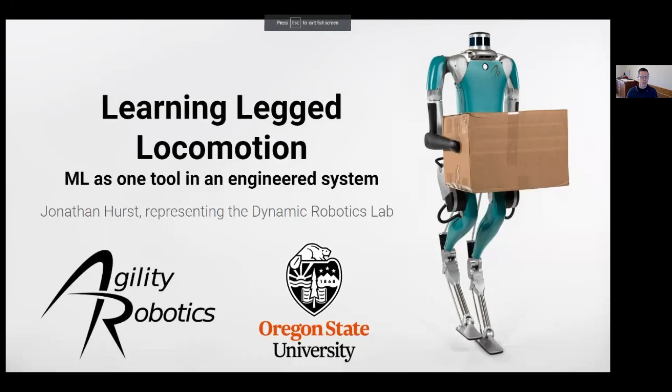Machine learning is a great tool. It's one of many. It's not a magical box. What I'm going to talk about for the first bit here is how legged locomotion is basically a special corner of dynamics. It's kind of a dynamical phenomenon, like a pendulum in the way the pendulum keeps time, or a spring mass system.

Same thing, it's periodic. And I think something like that is the foundation of legged locomotion. It's not just dynamics in general, trying to get robots to do arbitrary things. It's more to capture this special corner of dynamics and work with it.

And there's a lot you can do without machine learning. Most of legged locomotion progress to date is without machine learning. But I don't think you can do everything. I think too much of the approaches to date are model-based, and models, what do they say? All models are wrong, but some are useful. Certainly models are always simplified, and the question is how much simplified? It's a reduced order model, but how simple is it?

It's not capturing all the dynamics of the robot. And if you really want to get into the corners and really get into all the dynamics that a machine can achieve, I think that's going to have to be done with strange nonlinear representations that can probably be learned with machine learning. So the question really is, how do you guide this learning process when we already know so much about the goal? There's a lot of science we know about legged locomotion. So how do we incorporate that and steer our learning process given what we know?

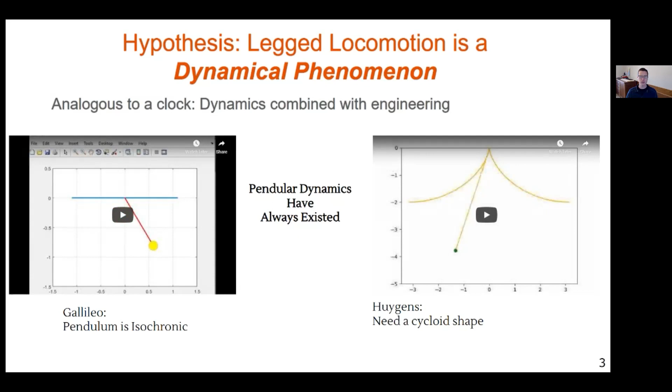And I think where we are today is more on the Galileo side, where we've kind of made some observations that this spring mass behavior really gives us some stability. And here's a simple model. This is very much a reduced order model, but it describes some really interesting things that we observe in all animal locomotion. It's very, very self-stable. It's very robust. There's a lot about this that is really interesting, that we think is kind of a special corner of dynamics.

This is sort of like a discovery. But again, I think this is kind of the Galileo version of the pendulum, where maybe this is capturing 80% or 75% correctly what's really going on. And we have yet to understand really what is the full, perfect picture of this dynamical phenomenon, or how to utilize it. That's okay, still useful.

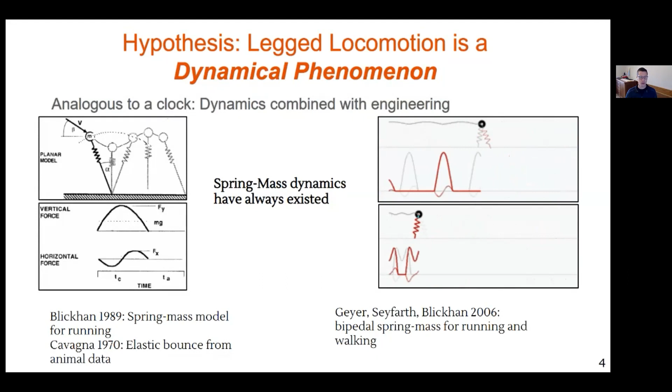And then I talked about engineering to capture the dynamics. If you think about a clock, it's not just a pendulum. You have to add energy to it. You have to count up the number of swings. You have to create a readable interface. You have to figure out how to insulate your pendulum from all the friction and all of the interference and all of the dynamics of your gears and things like that, or the weight or the temperature effects, air pressure, all the other things in a clock.

So hundreds of years of engineering went into making clocks decent timekeepers, with the pendulum anyway. And eventually, of course, they went to quartz crystals, which are oscillators and electronics, and so on. But let's ignore all that for now, and just talk about the special corner of dynamics that is a pendulum, and how the analogy between that and legged locomotion.

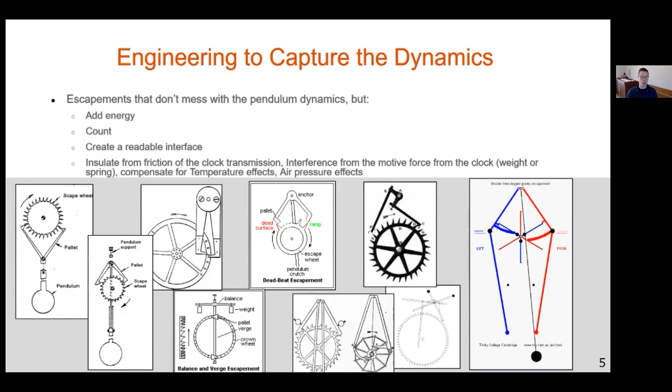Great, okay, so legged locomotion is a dynamical phenomenon, something like a clock, but there's a ton of engineering you need to do. And here's some of the engineering to capture the dynamics for legged locomotion.

Early on, we said, okay, I think we understand that this spring mass model is at least close, right? It's something, it's not just a descriptive pattern. It is very close to what the actual physics are that give us stable behaviors and robust behaviors and efficient behaviors on animals, and should be able to do on machines.

So we designed Atrias, which is an acronym for assume the robot is a sphere. The whole idea is to build a robot, build a machine that is as close as possible to this simple math model. And early experiments here, you can see the force and the ground reaction force when we pick up the robot and throw it in the air.

The motors are turned off. It's just going to bounce a few times. And we're getting pretty close to the ideal spring mass model. The green dashed line is the simulation. The orange line is what the robot actually did when it landed on the ground. So we built something really close to a spring mass model, okay?

Then we built it into the full bipedal robot, and we were able to get Atrias to do continuous transitions through the speeds between walking and running, which reproduced exactly what we saw in simulation. Very early on in the program, we were able to walk and run over all kinds of terrain, unexpected step ups and steps down that were a significant fraction of the leg length. It didn't matter what surface we were running on, grass or pavement or soft foam. It was self-stable. It just shrugged off all of those sorts of things as a dynamic behavior.

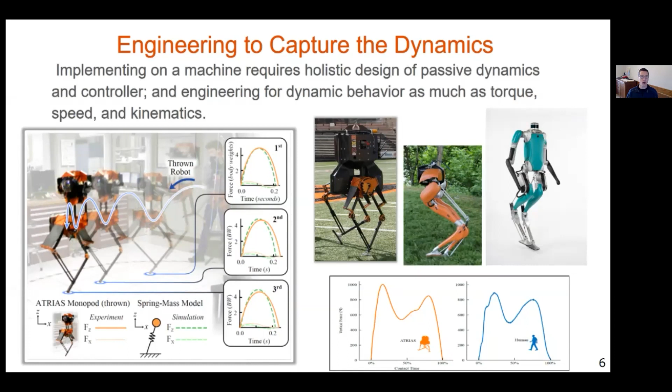So I talked just a little bit about the actuators, and I think this is an important point. Actuators have dynamics. They are a physical thing, and they are definitely not what you want them to be. So a lot of the machine learning demonstrations in simulation or control demonstrations for legged locomotion have been with simulated robots where you can apply the torque that you want at every joint. And that will never happen on an actual real robot.

In addition, the actuators, especially the electric ones we use, have a lot of what we call reflected inertia. That just means when you instantaneously change the speed of the output by a small amount, the motor itself, the rotor, has to change its speed by a very large amount because there's a gear ratio on it. And that reflected inertia of the rotor spinning up that you feel through the output can be very, very large.

It can be on the same scale as the mass of the entire robot. So when you take a robot that has a 100-to-1 gear ratio, like a harmonic drive at the knee, and you lift it up and drop it on the ground, you're basically causing an inelastic collision between the reflected inertia of your motor and the mass of the robot. It doesn't matter what software you write, it's going to be that way because it's physics, it exists in the hardware.

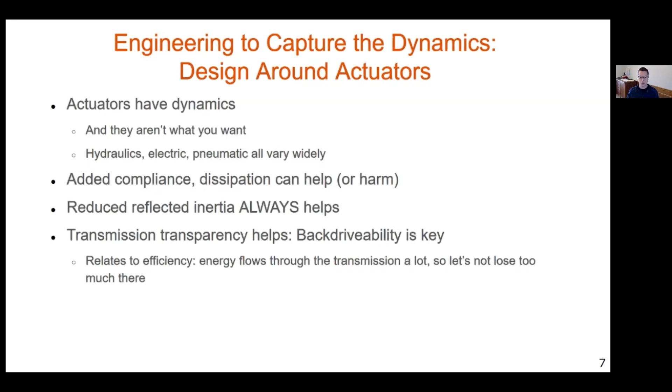Certainly there are a lot of adaptations in animals with structures like tendons and the way the muscles are configured and shaped on joints that clearly alter and vary the dynamics of the muscle. So in an animal, it is absolutely not all software. It's not something where you're sending muscle commands to have your arms and legs do what they want. There's an immense amount of passive dynamics designed and built into all animals in order to create appropriate dynamic behaviors.

Okay, so a little bit more about this, designing around the actuators. Transparency is key. And transparency, I would define as: in software you command a torque, and in hardware you get exactly that torque, at all frequencies, at all amplitudes.

So if you command 500 newtons, you get 500 newtons. If you command it to oscillate between positive 500 and negative 500 newtons at 5,000 hertz, you get it. Obviously that's not possible because of the inertia associated with motors, electrical dynamics, and everything else.

So if you can reduce your reflected inertia, make your motor rotor lighter, make your gear ratio smaller, find a way to get enough torque out of something without having a big gear ratio, eliminate friction, have a completely transparent efficient transmission - things like cable drives - we got something like 93, 94% efficiency in the cable drive on some of these early robots.

That's great. There's other drawbacks to a cable drive, but a harmonic drive is about 75%-ish for friction, and that can be really limiting if you're trying to apply forces to the world because you don't know what force you're applying.

I'm getting a question from someone: what would I like to see from the future of electric actuators? The best example, Ghost Minitaur, is a great direct drive robot. At a very small scale you can do that - you can have relatively very low inertia and relatively enough torque to do what you want, and get that robot to leap and jump and do all kinds of things.

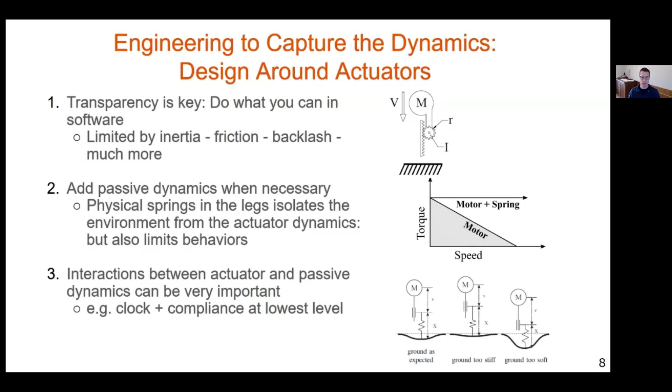Let's see, what else can I say on this slide? Early on, it was an interesting observation that if you have some sort of clock cycle - say your controller is only operating at 30 hertz, while control systems can run at 2 kilohertz easily - you still can't really perceive your environment. Sensors are always noisy, late, and wrong. So it's very, very hard to plan exactly what you're going to do through some sort of impact or contact with the ground.

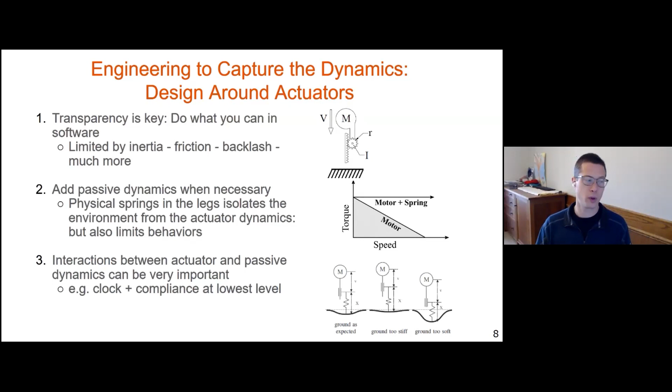But if you have a clock-based feed-forward cycle based on what you expect to happen, in series with a big compliance, we found that's very self-stabilizing. If you hit a little early, a little late, or hit ground that's too hard or too soft, the immediate reaction just from the dynamics of that clock in series with the spring is stabilizing - it causes your ground reaction forces and center of mass motion to go in the right direction. Then you can react fairly slowly, but creating that stability as an inherent part of your system is what's important here. There's a lot to solve there, a lot of science still not understood.

Okay, so I talked about the dynamical phenomena of legged locomotion. Maybe another way to think about it is as some sort of periodic attractor. When I talk about a pointer pendulum or a spring mass system, that's a 1 degree of freedom system - there's really not a lot you can do to influence that system. It's just 1 degree of freedom. It is stable. It keeps time.

One of them for sure is transitioning between the gaits. Maybe that's how much energy you add, or how you change your clock cycle in order to scale between them. But whatever gait you land on is still a stable, self-stable periodic attractor - just you've got this degree of freedom. Now another one might be stride frequency and stride length. I don't know the answer really.

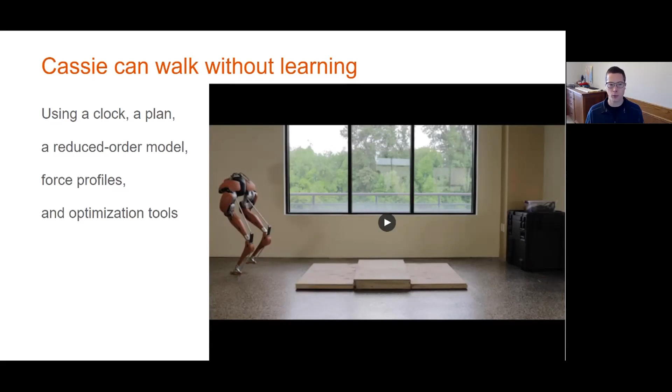We have a reduced order model inside that allows us to make choices about, say, where to place the feet in order to stay balanced, and an optimization tool so that you can basically map this very complex robot - with lots of joints and more behaviors possible than the reduced order model would enable - but optimize for your priorities so that you actually get close to what your reduced order model is saying.

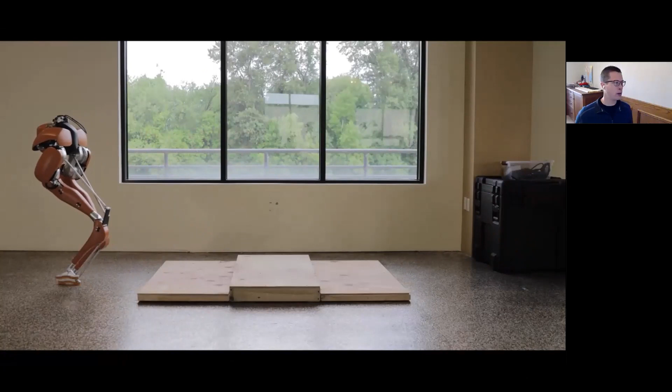So here's Cassie just walking over some unexpected terrain and handling it pretty well because of the transparency in the actuators. You'll see that the robot maybe steps up a little bit, but at first when it steps on these, the leg kind of squats a little bit. The leg just kind of takes that obstacle.

Think of it as force control. If you're applying a certain amount of force on the ground, then the deflection of the leg doesn't matter. And that's kind of what's going on right here.

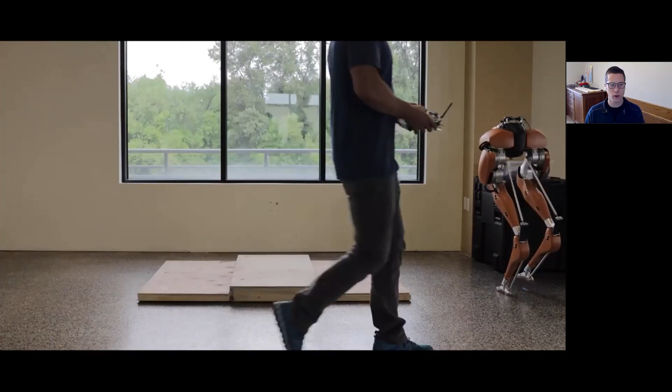We have a priority for how much force we're going to apply, and also a small priority for position. Because say you know exactly what force you want to apply, but you've got a tiny error in the force you're applying, the robot is either going to sink to the ground or accelerate up continuously. So you do want to have some priority as well on the position where you are. That's what I mean by optimization tools. We've got several different goals, and it's balancing between those goals, kind of trying to optimize for things.

Hey, Jonathan. Yeah. Can I ask a quick question? Please.

With respect to your point about locomotion being a dynamical phenomenon, can you comment on the sort of anxious pace that Cassie does even while stationary? Cassie can certainly stand, but our controller has a clock as part of its foundation, so really it's walking at zero velocity when it's stationary, because we turn on the walking gait and walking behavior, and then we can just change its velocity. That changes its foot placement in order to go forward or backward at different speeds. That's all it is.

I don't think that's necessary. It's just that's what our controller is doing right now.

Oh, that makes sense, because you're just getting ready to steer it. You're getting ready to drive it, right? Yeah, and so this is very manual, right? The operator is saying on his controller, okay, turn on walking gait behavior, okay, change speed forward, backward, etc.

There's not a lot deeper than that that's going on here. But what I would like to be doing is going towards this kind of periodic attractor, which probably has a zero energy point too, that's also stable, which is standing, which probably looks a lot like zero moment point control. It's just using ankle torques in order to stand in one place. But that, I think, is on a continuum along with the walking, running, hopping, skipping, jumping, and all the other things. I just don't think we've figured out how to implement that well on hardware.

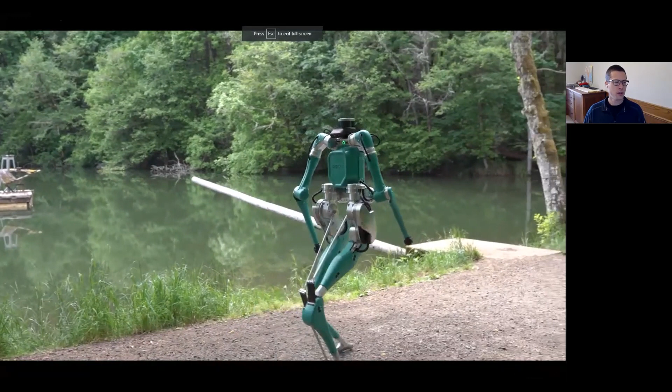I also want to show a couple of brief videos, the only two I'll show, of Digit walking around outside. It's the same configuration of legs as Cassie because physics is still true, and the reasons we designed the legs the way we did are still the case, although there are a lot of differences internal between the Cassie and Digit legs.

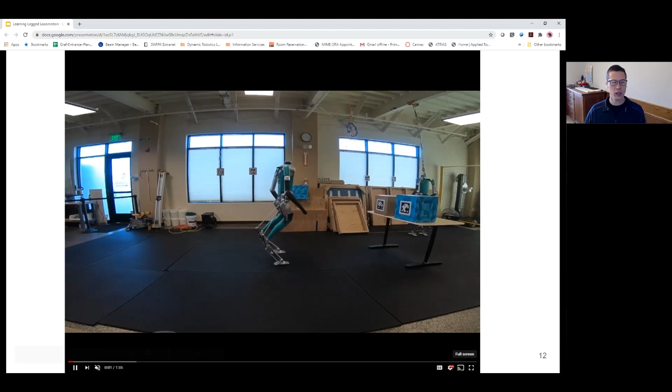Building on the locomotion, which we haven't been paying a lot of focused attention to, we've been working on incorporating using the arms to swing, to manipulate the world and balance the robot with different masses of things you're picking up, catching the robot when it falls, reorienting to get back up, and starting to add in perception. The robot here is using QR codes to identify where the table and box and everything is in the room, using LiDAR to avoid obstacles. So we're starting to build a much bigger stack on the foundation of basic locomotion. There's so much room for improvement in absolutely everything the machine does, so we really have to pick and choose what we're going to be doing.

The nice thing about learning, as I mentioned earlier, is it gets into the corners, I'd call it. What I mean is that when we're controlling Digit or Cassie, we're relying on some reduced order models, and that constrains our behavior. There's a real constraint.

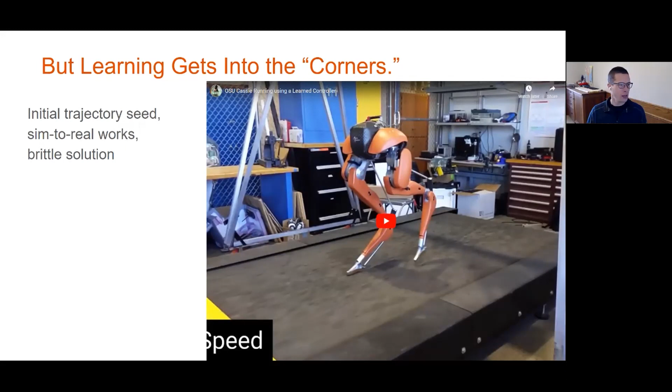But in this video I'll show, we started with an initial trajectory seed that came out of Cassie's traditional controller we'd already created. We tried it on the robot for the very first time, and it worked. We were able to do the simulation-to-real transfer. I think a lot of that has to do with the correlation between the robot's behavior and the simulation's behavior.

It also has to do with the self-stability of the behavior we're trying to create. The robot is roughly a spring mass system, so inherently it has a lot of those stabilities I talked about early on in this discussion. But we're not really explicitly utilizing them, we're kind of accidentally utilizing them here, and it is a pretty brittle solution.

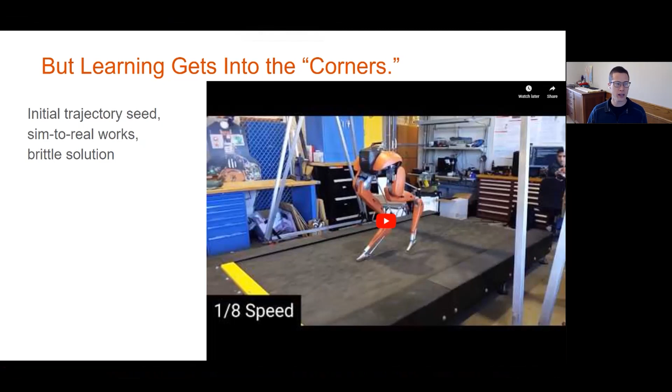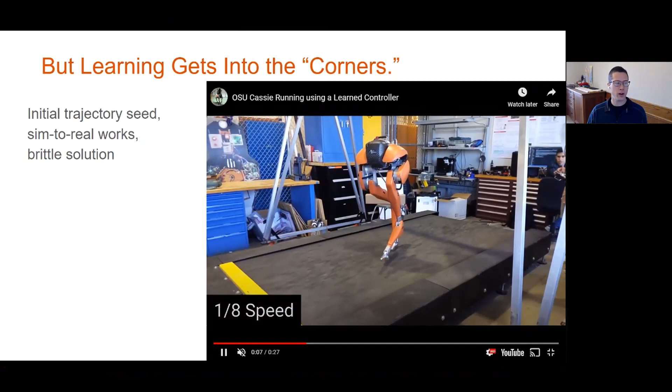This running gait, I love it, I think it looks very biological, I really like it, but it does fall reasonably easily. It's very sensitive to the friction cone on the feet. This behavior worked on the treadmill, but when we did it on the road, even the crown of the road, it was falling sideways. It would twist its feet when they'd slip and twist on the ground on pavement, and it would fall over.

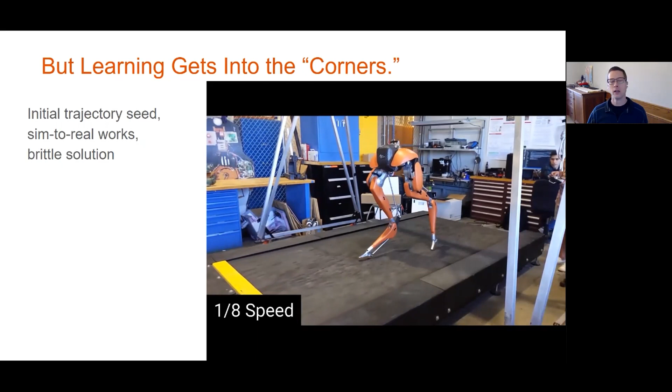So this particular initial idea was pretty brittle, but what a dynamic behavior we couldn't achieve without learning. I'm actually taking longer than I thought to talk, so I'll have to move along a bit here. But the question is: how do we guide the learning process when we already know so much about what we're trying to achieve?

There's a couple of ideas we have in the lab, starting with learning a gait library, and then using this reduced order model both for training, to give you the full range of different gaits, and for control, as a way to define the action space. We can use our reduced order model to go through the range of different gaits, trot, or with a biped it's just walk, run, skip, jump, working towards real-time model predictive control using that reduced order model.

Now the next idea is let's learn in task space, since that's the common language. What should the feet be doing? What should the center of mass be doing?

We already know a lot about the robot, and we already know a lot about how to coordinate the joints. So why would we relearn how to do all of that and put the burden of the inverse dynamics and inverse kinematics on the learning system? We can just put that in there and learn in task space.

And the next idea is, okay, forget reference trajectories, forget even models. Let's see if we can describe everything we know about legged locomotion through the cost function. That gets some interesting results if you're very careful about it. But then kind of back to a little bit of the middle ground, that clock seems to be really important for periodic behaviors. Can we give it a really simple trajectory, just a clock signal basically, but describe legged locomotion by the cost function, and where do we get with that?

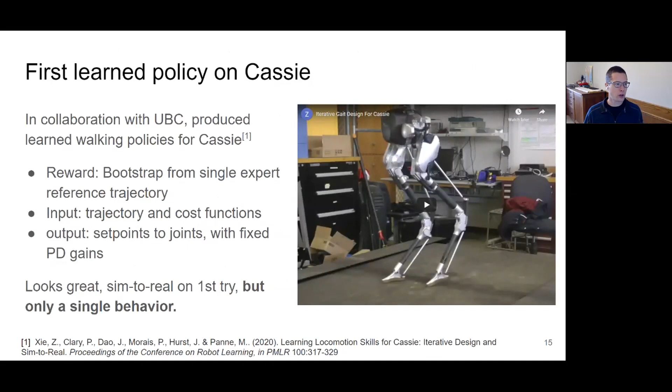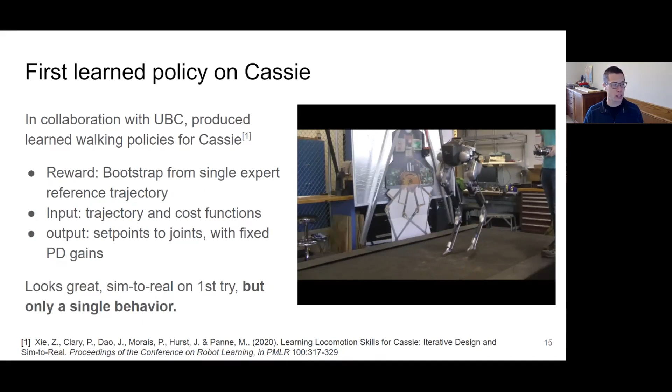So this is the first learned policy on Cassie, in collaboration with Michiel van de Panne and the University of British Columbia. And kind of like the running behavior I just showed, it's bootstrapping from a single expert reference trajectory. It's just giving it position trajectories, which in my opinion is a very incomplete description or even hint of what's important. Because certainly if you hit the ground a little high or a little low, or you have a slightly different environment that you're encountering, you don't want to be running that original trajectory at all. That would be a bad choice. So it's bad information to bootstrap from. Nonetheless, we were able to get some pretty good results, but only for this kind of single behavior we were creating. And it did give us some interesting stability and robustness. I don't know why, but it did.

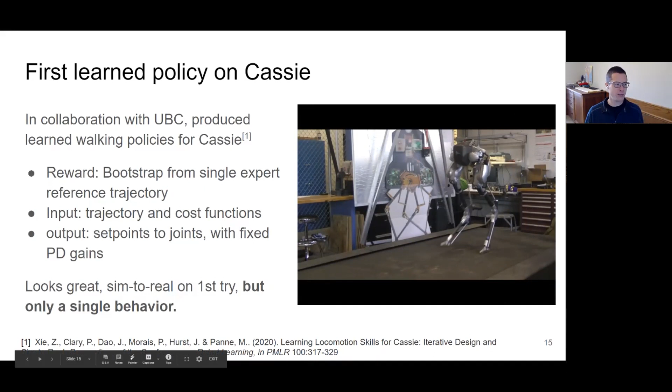So the next idea I mentioned, right? Let's use a reduced order model. Let's create a whole library of hundreds of different gaits that come from or are inspired by different gaits from the reduced order model. And here we're giving it a lot more information than just trajectory. We're giving it the pose, yes, but we're also giving it the velocities. So we have an idea then of the forces that are being applied, because that model has those physical springs built in. And then we are, in this case, just commanding the set points to the individual joints.

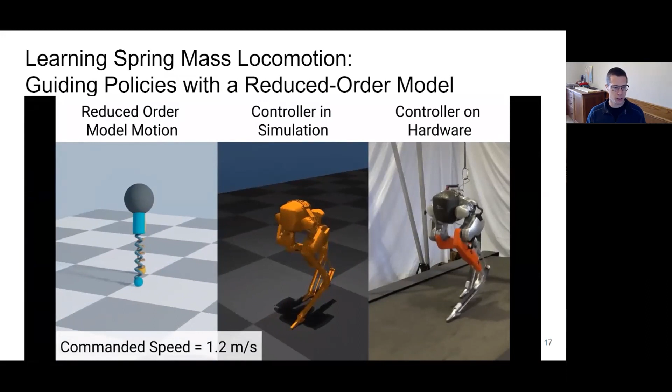So this continues to be work in progress. It's aiming for IEEE right now.

Now, the next step with this is, instead of having a gait library, do something that's a reactive planner, something that has some perception of the world, chooses what it's going to do at the reduced order model level, and then has the motion command. I don't know if I would even call it a motion command. It's more like, what is the state of the reduced order model? What forces, what is the set of dynamics that you're trying to create? If the foot is about to impact the ground, where should it be? Approximately what force do we want to be applying at the given point in time? And if the ground impacts the foot at some point, how do we want that foot to react? What kind of impedance would we want it to have at that point in time? So that's a lot more information than just a position trajectory, because we are creating a dynamical behavior here.

Okay, so then the next idea I mentioned: why would we learn all the joint coordinations independently if we actually have a lot of information there already? And sure enough, when we learn in task space using this reduced order model kind of thing, it learns a whole lot faster. It doesn't have as much to learn. And it is successful in doing some nice walking gaits. This kind of looks a lot like that spring mass behavior, but it learned it pretty quickly.

I think there's a lot of promise here too. I don't know that the inverse dynamics, the inverse kinematics that we calculate for the robot are certainly not perfect, because there's a lot of unmodeled dynamics going on in the hardware. But this is showing that we're able to split things out in terms of how we tackle a particular problem. This is just a small part of the overall control system.

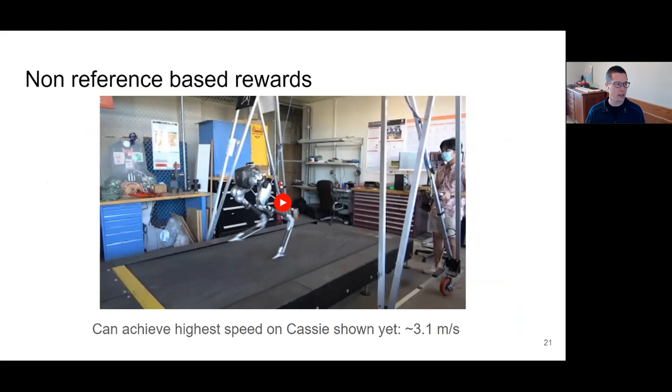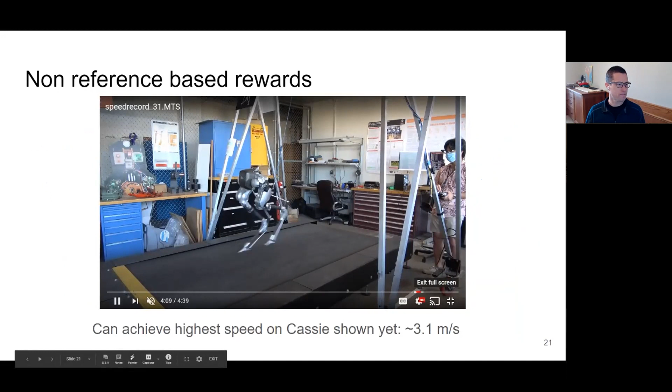Here is a non-reference-based reward — no trajectory, no prior behavior that we gave it, just describing it in terms of the cost functions. And we got the highest speed we've been able to show yet. This is actually faster than the running gait that I showed at the beginning. I like the running gait, but this is faster, so not too shabby.

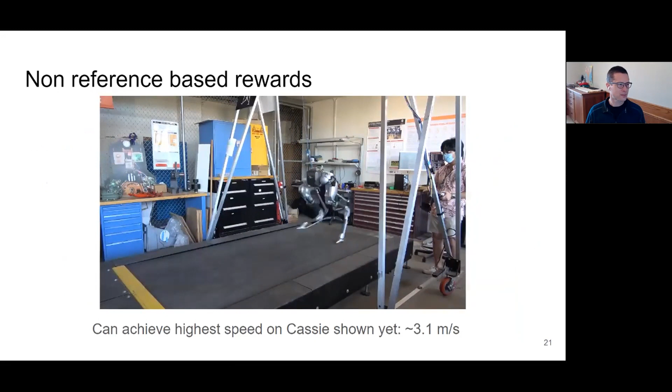All right, so the next idea. We're describing all of our behavior through cost functions, but let's pick a middle ground here — give it a little bit of a hint, a little bit of information. We don't actually know what an optimal trajectory should be. Maybe the reduced order model is too constraining, or we could do it in a much more computationally simple way. So that's what this effort is: choosing a set of clock inputs that are very easy to modify, very convenient for the learning policy to utilize, and much more computationally effective than using a reduced order model.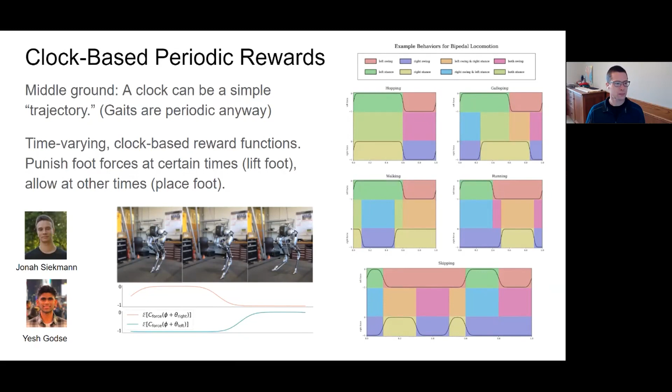We were able to get some really surprisingly good behaviors out of this, just choosing the duty factor of which foot is on the ground and when. Here's some transitions between gaits. By the way, we haven't shown any of these videos — this is the first time I'm showing these publicly. Some of these results are just from the last couple of weeks.

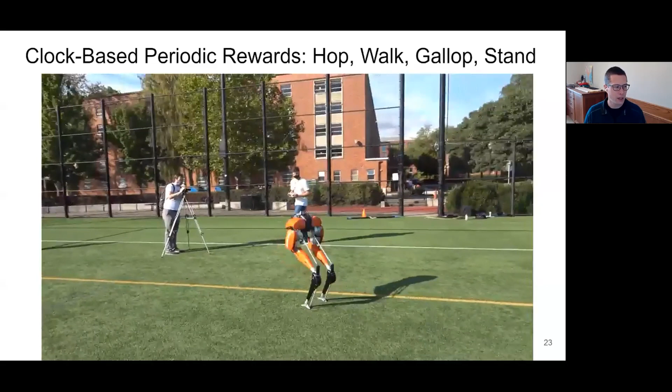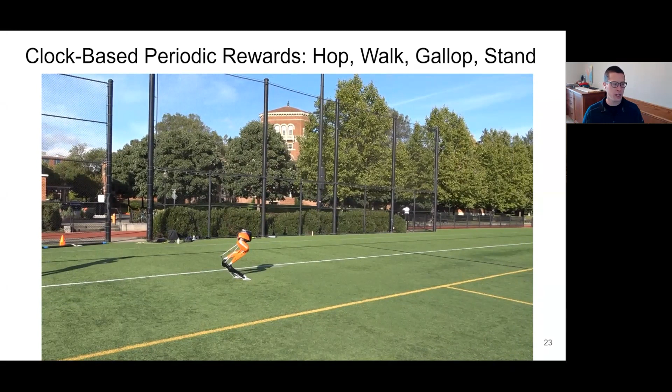Here's Cassie hopping, and it'll do a transition from hopping to walking gait, then a little bit of galloping, and back to a stand behavior. All of these were learned in simulation and then tried on the robot. There's no online learning with the robot — all the learning is done offline.

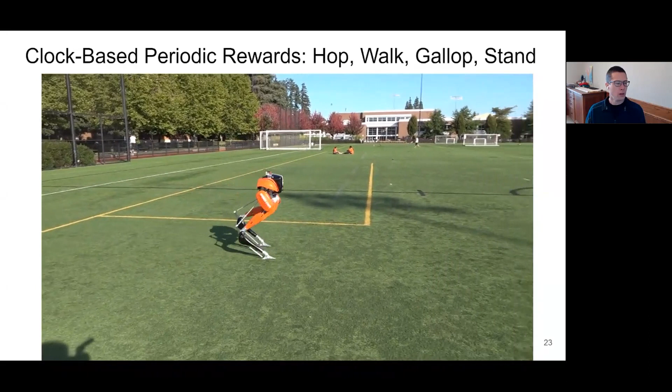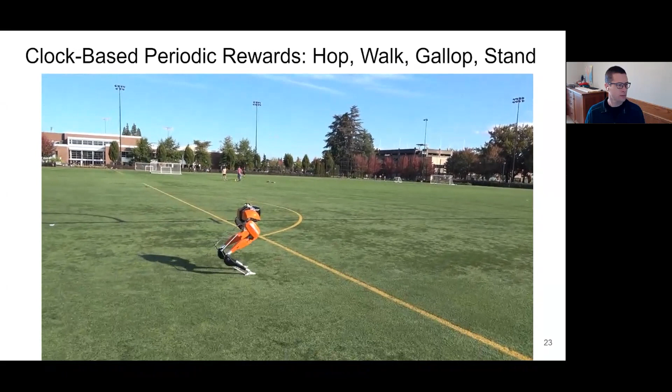And that's what it looks like standing, right? We're still working on having that clock come down to zero amplitude so they can stand in place.

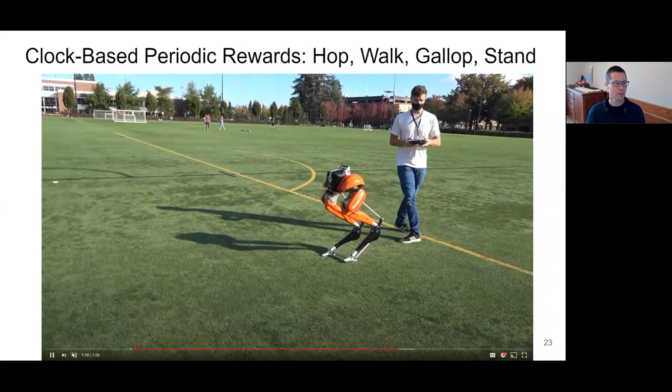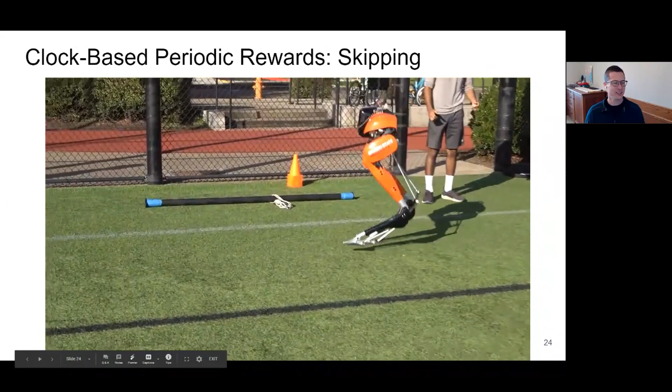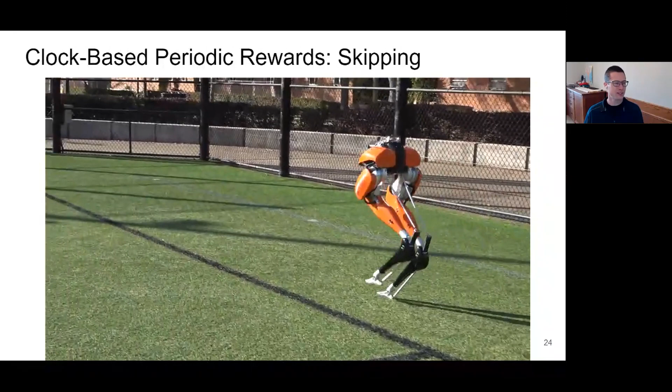And this one is pretty cool. There's no good reason to skip, but we can change our clock cycle a little bit and make the robot look very happy. Nice sunny day outside. Off we go. We need to get a red hood for the robot and a basket.

Oh, okay. I didn't cut out the fall.

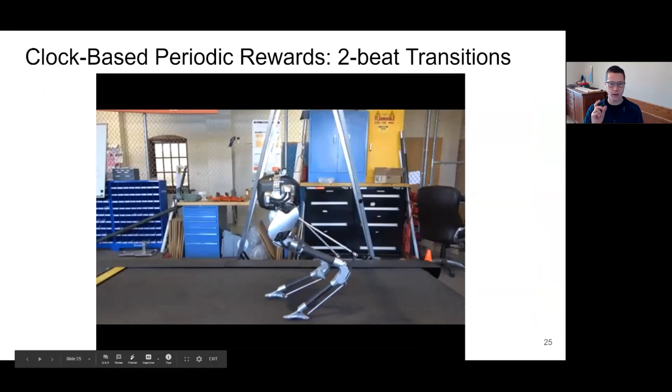So when we're doing the clock cycles, we can do a couple of different options. Here's a transition for the two beats. So really we can only do walking or hopping when we have just the two beats for the gait transitions. But we can do the transitions between them pretty smoothly.

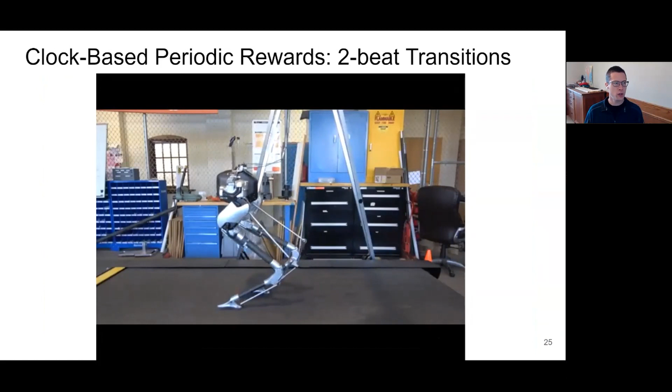And then if we increase the number of beats to a four-beat transition, we can include a couple of other gaits like the skipping behavior and a gallop behavior, and transition between all of those.

So this, by the way, is not task-based control. This controller is learning all of the coordination between the joints. It takes quite a long time to train in order to do that. I'm sure we can do better if we split things up a bit, but we're getting some decent results this way too. I was curious about this before, actually.

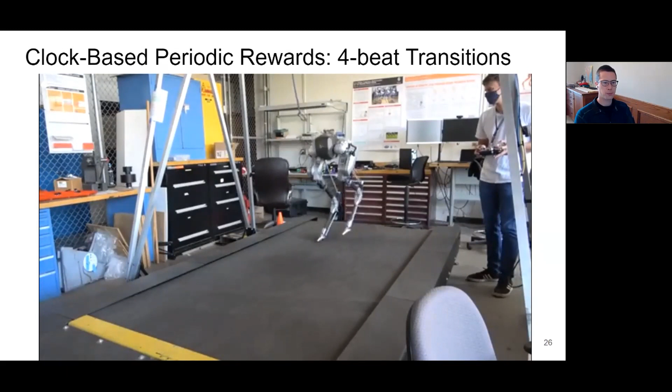Do you have like a one-sentence answer for what class of algorithms you're using to do the training?

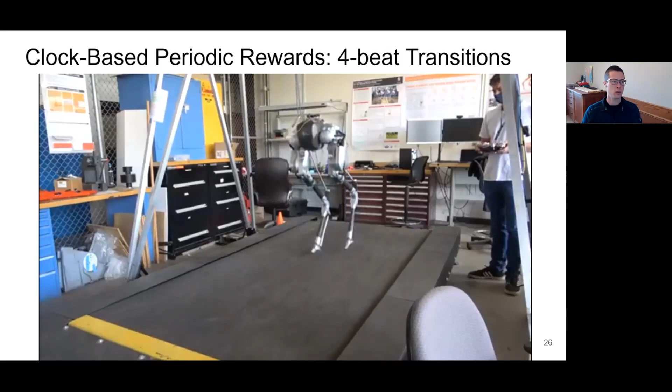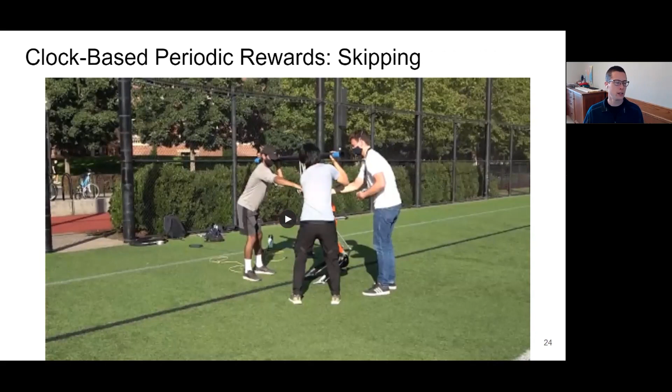It's a good question. The focus of this research is not on that. We're using old, classic, decade-old kinds of algorithms. There's not a lot of innovation on exactly what algorithms we're using for machine learning. The innovation is entirely how do we structure the problem and how do we engineer it. I think this one was with recurrent neural networks for some of these behaviors, like the skipping behavior, but there's also just feed-forward networks that have no internal memory whatsoever. It seems like we're able to be successful using a number of different approaches, and maybe that's less critical than setting up the structure of the problem.

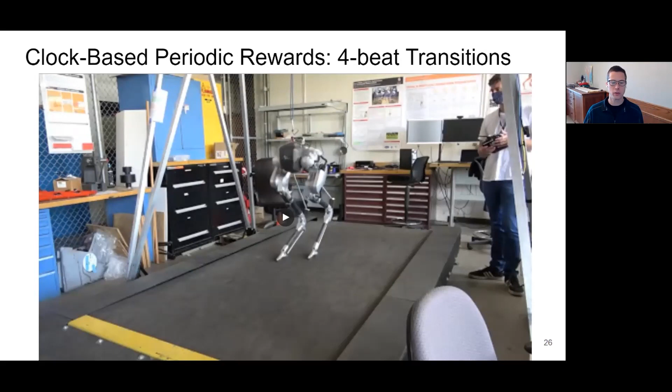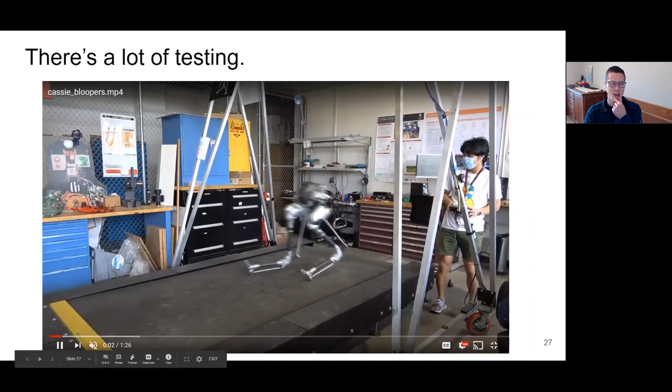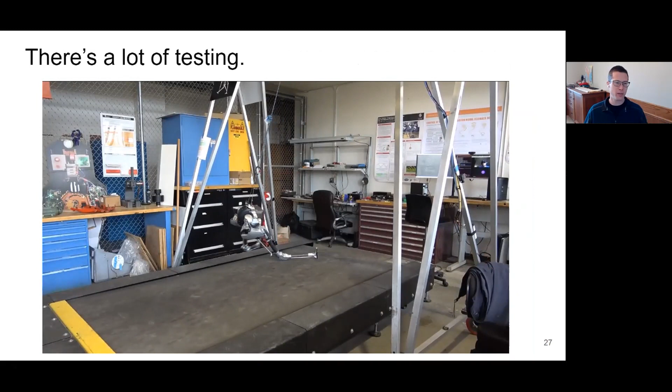So I'm getting close to wrapping up here. I want to point out there's an awful lot of testing, an awful lot of falls, and a lot of these have nothing to do with the learning policy. A lot of these have to do with the state estimator having problems, or a part broke, or in this case, whoever was controlling the speed on the treadmill wasn't on top of things. There's a mechanical failure.

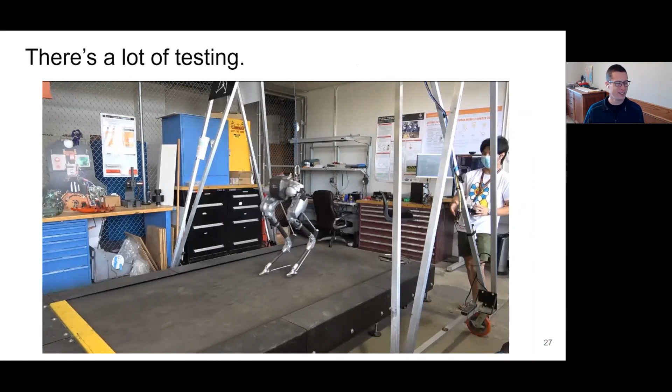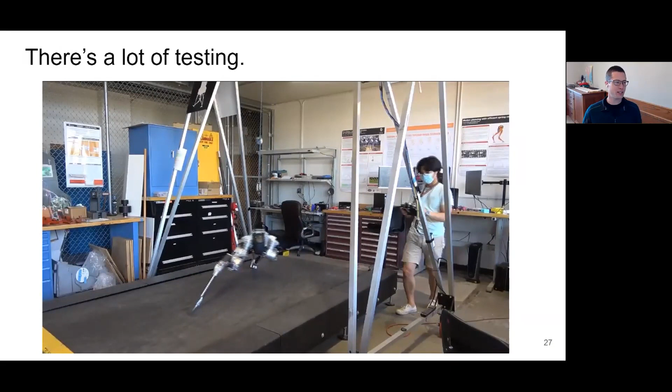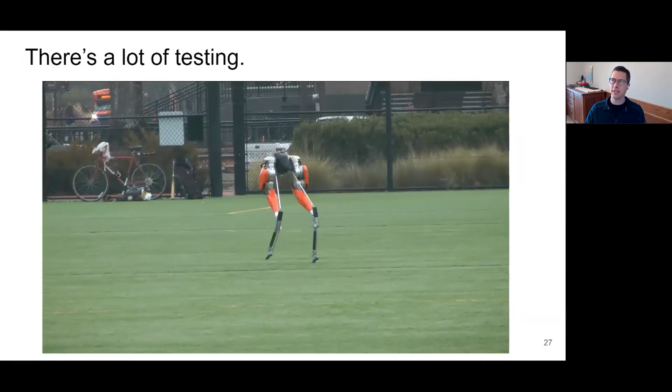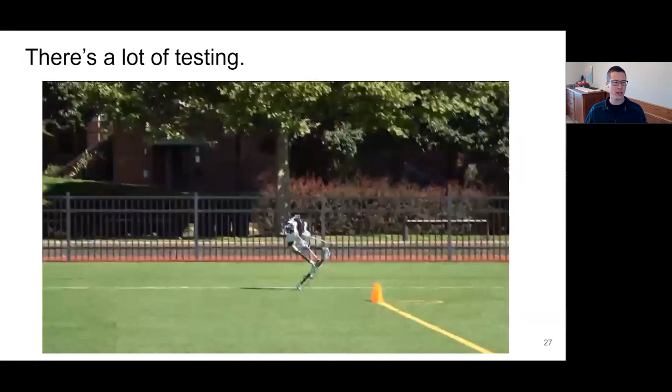I love that one because it accelerated. It's basically getting a big shove if the treadmill stops, and it didn't fall. It kept running forward. One of the problems we were having this day filming was actually data logging. Every now and then, it would just pause the control outputs and the torque commands for a quarter of a second while it was trying to save a bunch of logging data, and that caused a bunch of these falls. You could see that leg just pause in the air.

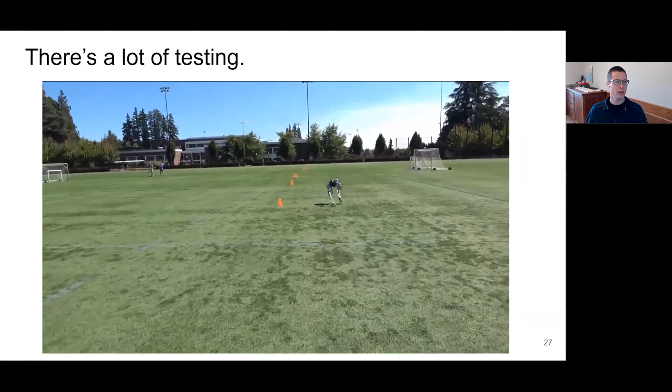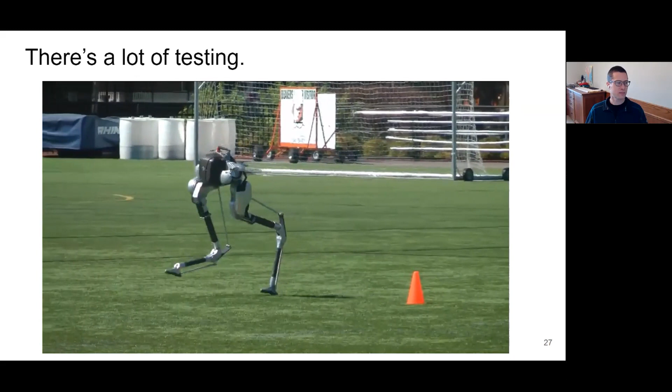So having some hardware that's reasonably tough, that's pretty important. Having the support at Agility Robotics that's able to fix things, that's been useful. There, that leg just paused and just didn't come down. The controller was telling it to, but the log files were being written.

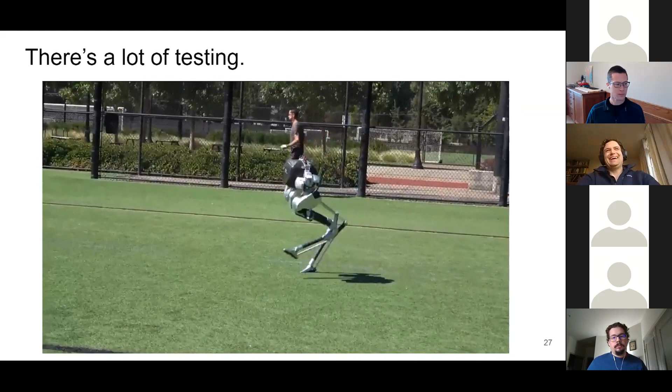Okay, that's fantastic, thank you so much, Jonathan. That was a spectacular gallery and constellation of ideas and just awesome results. I want to go to what I think will be probably a quick question, and also just give you the opportunity to do a plug. There was a question kind of halfway through: when can I buy one of these? So more generally, what is available from Agility? What do you want to say about that to the people?